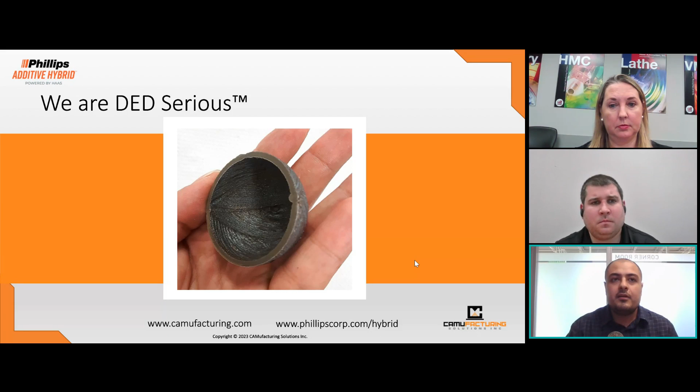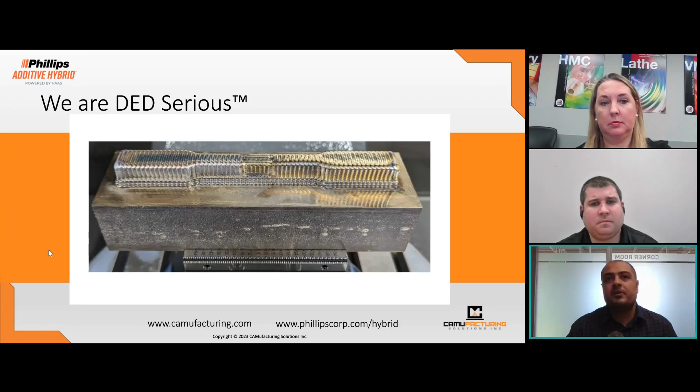Here, actually, you can see a dome. The reason I have it here is to emphasize that we are very DED serious. That means we don't only work on the software product, but also we try to move DED forward by research. We will talk about this part a little bit more later on. But the main thing I want to say is that we always say that additive manufacturing is not just reverse machining toolpaths. And every single parameter that you see in APlus, we design and enhance based on the characteristics of DED. And that cannot happen unless we stay ahead by investing in research and forming partnerships.

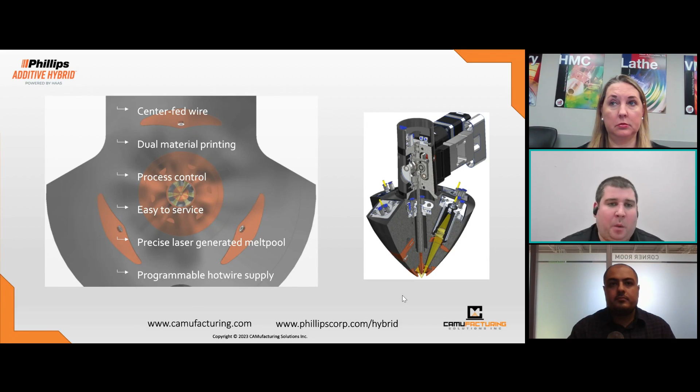Kind of a quick overview or image of our hybrid integration. So we're mounting this Meltio deposition head on the right-hand side of this, in this case, a Haas UMC 750 spindle. We integrate across the large majority of Haas mills. But regardless of the actual mill being used, we always mount on the right-hand side due to the tool changers being on the left-hand side of the spindle.

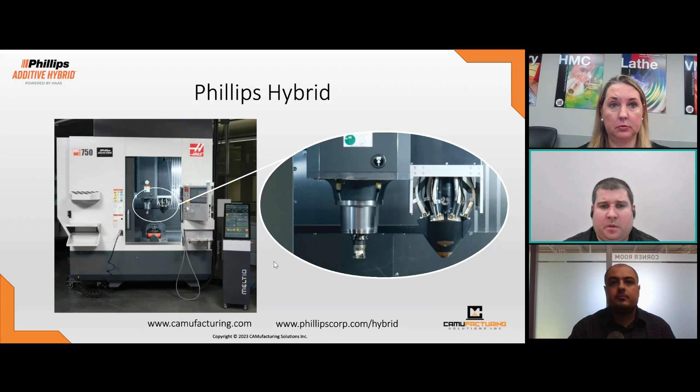At the end of the day, this is still a laser welding process. Really nothing new except we're adding this technology into CNC machines. That way we can deposit and then remachine all in the same system. So conventional, standard operating procedures for welding would be applicable to this technology.

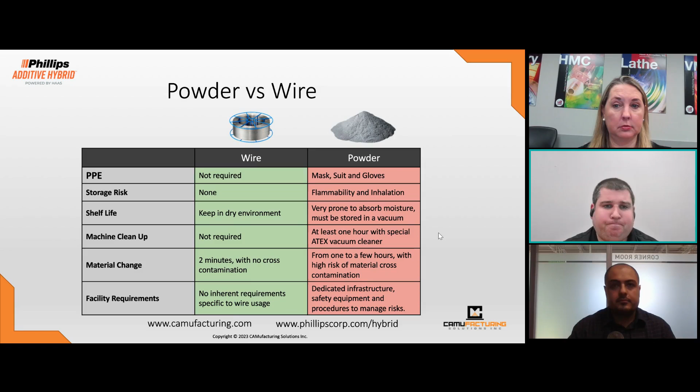Kind of the steps that we take to integrate machines. So we're mounting onto, as I mentioned, the right-hand side of the Haas spindle. Depending on the actual Haas model used, we have specific adapter plates. So we drill and tap into the casting of the Haas mill, and then we indicate our adapter plate square to the machine, which allows us to maintain the machine geometry when we add the deposition head. So that way essentially the W axis or the redundant Z axis is square to the machine tools X, Y, and Z, and then in some cases rotary axis as well.

We add laser safe glass to make the enclosure laser safe. That way we don't have to wear additional laser safe glasses. I kind of joke and always say it's like looking through a pair of nice bluely tinted sunglasses. And then we add additional door interlocks on the side of the Haas enclosure. That way, there's no way to open the side doors while we're printing, and that's all interlocked back into the Meltio system. That way, if the door were to ever be forced open, it would automatically break laser security, and you would automatically shut the lasers off if the doors were open.

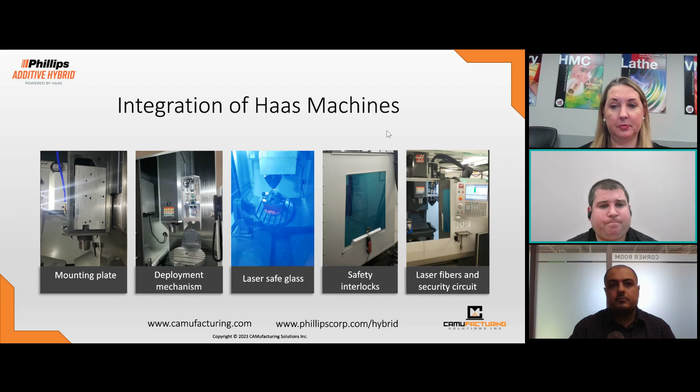Overall, Meltio's technology, when we talk about CNC integrations with Haas machines, we're kind of middle of the pack when it comes to overall part size as well as complexity. When you get into really fine resolution parts, under 0.5 millimeter track widths, powder bed fusion can certainly make a lot more sense. But we're going after kind of the larger range of applications, parts that would be casting replacements, or parts that may be machined from an expensive billet. That's kind of the realm that we're looking for hybrid applications.

The fine features, we can get down to about 1.5 millimeters track width and about a 0.5 millimeter high layer height, but we're really focusing more on that 10 to 20 kilogram part range.

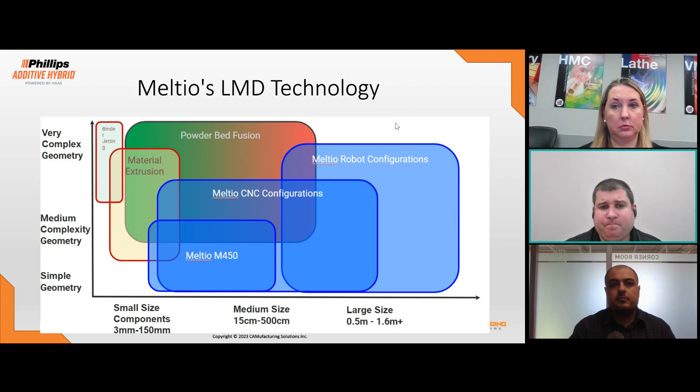Overall, because we're integrating into a Haas controller, the G-code structure is very straightforward. We have additional M codes to turn on the actual welding functions, lasers on and off, start wire feed, turn off wire feed, etc. It's essentially the same G-code you would run on a normal Haas machine.

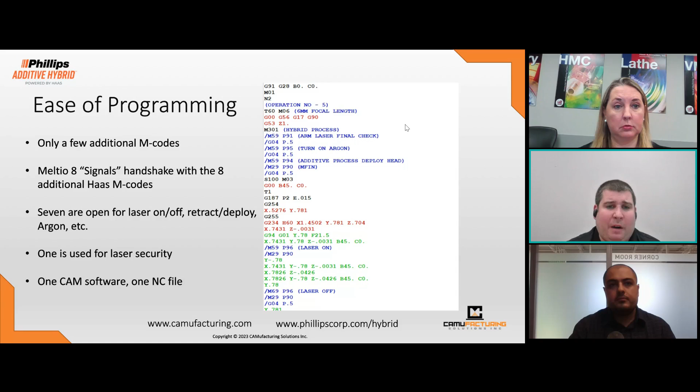Anyone familiar with G-code structure can see all the block deletes. We put block deletes on all of our welding lines of code. That way, if you wanted to turn on block delete and omit those sections of the program, you could do a dry run on the machine as well. So that's why all the block deletes are on those lines.

We use a post processor that we've worked with, post processor developer Postability. So it's one G-code program to run both the additive and subtractive. We're not merging NC files together. This is all coming from one post processor, one machine simulation. And that's really the point, and why we've worked so long with Mastercam, APlus, and Postability, is to offer this fully packaged solution where someone's using one software to do all programming functions of this machine.

So it's very straightforward. We'll get into some of the GUI in Hamoon's portion of the presentation, but it's a very streamlined approach. Mastercam users will see a lot of familiarity when we talk about the additive toolpaths inside of APlus.

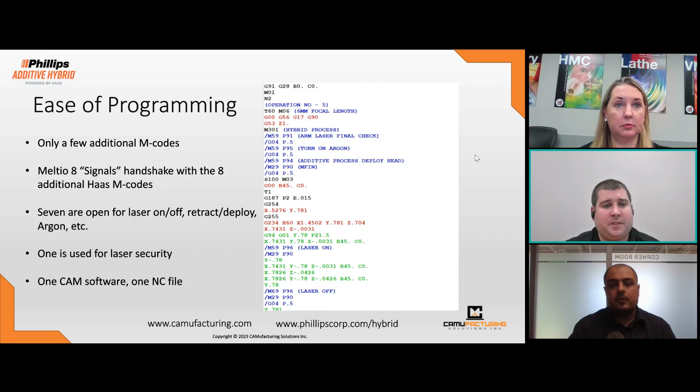Now back over to Hamoon. Thanks, Brian. So before we get to some actual case studies that we are going to talk about today, I would like to give some introduction about APlus itself too.

So APlus is the additive add-on of Mastercam. It supports programming and simulation of additive manufacturing processes in Mastercam, and it's seamlessly integrated with a very familiar interface. That means when a user installs APlus on top of Mastercam, they will just get 2 extra ribbon bars on the top ribbon bar.

And we try to keep all the toolpath interface very similar to Mastercam. That will make it much easier for existing Mastercam users to learn APlus too. APlus is optimized for directed energy deposition, but it has a modular software design to support new and other additive manufacturing processes too.

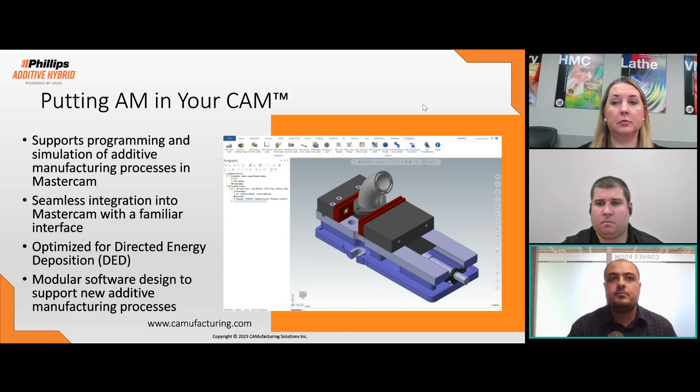So what is very important here is that APlus is not just like a slicer that you can see. It has a lot of different solutions for different types of geometries and different types of manufacturing strategies. For example, this part you can see, it's built with an APlus rotary toolpath.

On a Phillips hybrid Haas UMC 750 with a 1.2 kilowatt Meltio print engine. So it was built with a rotary toolpath, meaning it was built with a continuous deposition without any planar slicing.

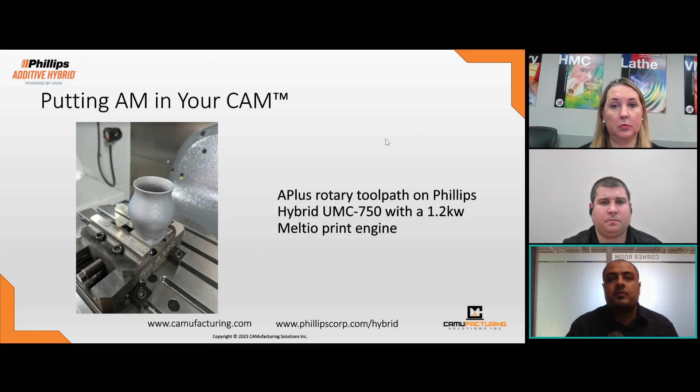So if I would like to talk more about different toolpaths, we have 9 different toolpaths and solutions in APlus that you can use based on the part characteristics, geometry, and the strategies that you want to use.

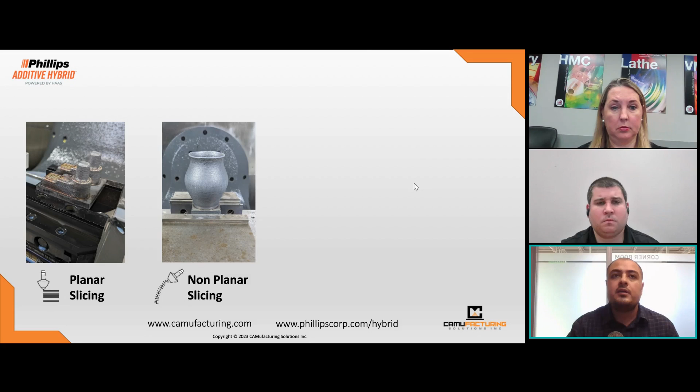If you have a part like this, you can just use one of our planar slices, which is AM slice or AM exact overlap. But if you would like to build something like the next picture, a rotationally symmetric part that's a thin wall, you don't even need to slice it. So you can use a non-planar slicing strategy, which in this case is AM rotary.

But if you would like to build on top of a cylindrical substrate, for example the picture you see, or even make a roll die or repair a roll die, because that's the advantage of hybrid manufacturing, that you can machine, add material, and then machine again, we do have a slicer for that, called radial slicing. It slices your geometry radially, uses a polar system instead of Cartesian, and it's very good for this kind of part.

But if you have a part that you would like to slice, but not through a normal build plane or radially, a part like this, you probably prefer to slice it through the spine, which is swept around it. So that's why we have a spine slice, and it means you definitely have to have a variable layer height, but that is also possible with the software and this Phillips hybrid machine.

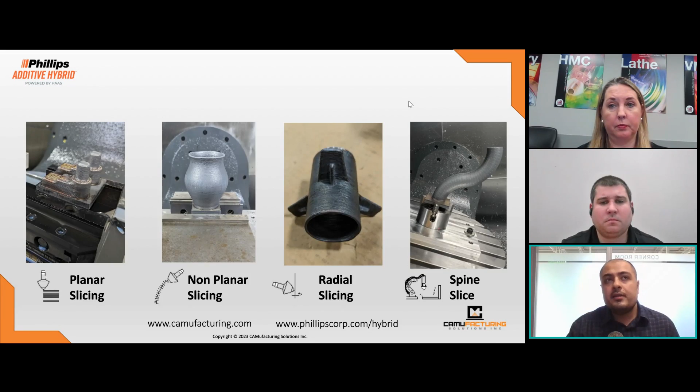So on the next slide, we can see more examples of our non-planar build strategies. For example, the two pictures you are seeing now are both spine slice examples.

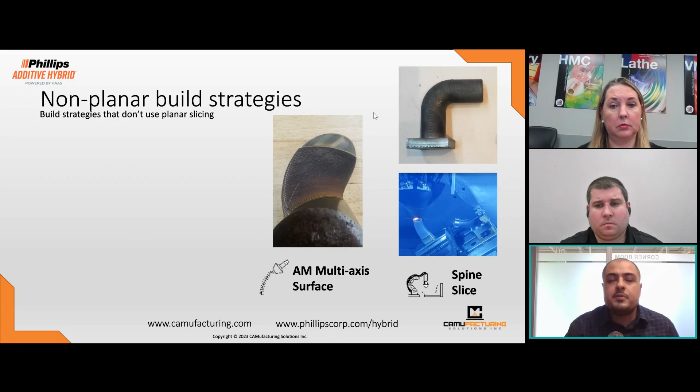But we do have also another toolpath, which is AM multi-axis surface. So for this toolpath, you just can use any surface in the 3D world. It doesn't have to be planar or any shape, and make a toolpath on it. It's very good to build like turbine blades like this, or even to coat a surface or make a repair on an existing mold. Also, on the next pictures, you can see more examples of rotary or radial. These are some of our non-planar toolpaths.

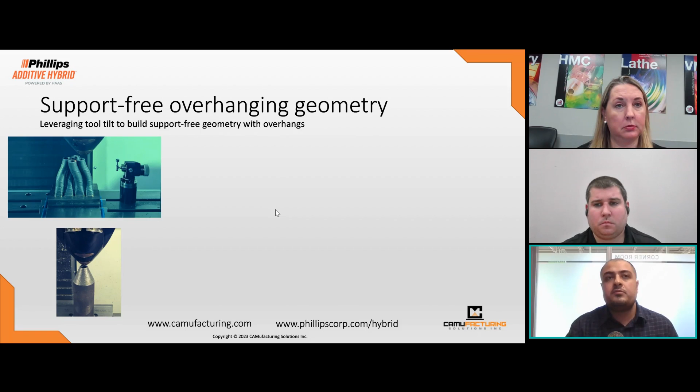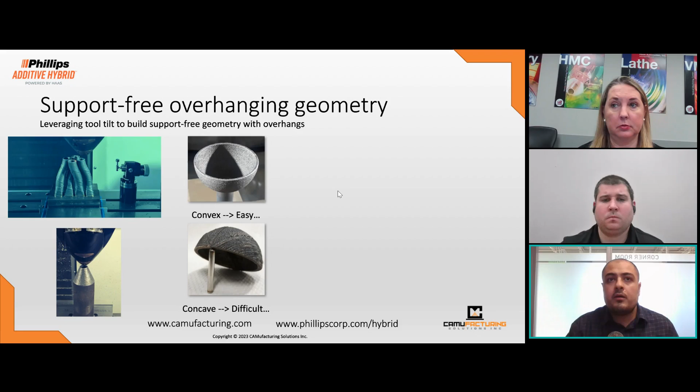Also, for your strategy and the way you are building the part, we try to have different solutions. For example, if you would like to build a convex dome, it's going to be very easy. You can just use a rotary toolpath and build it, as shown in this picture. But if you would like to build a concave dome, it's going to get more difficult. So this picture may look familiar from the introduction part. This is actually one of the parts that our research team worked on a few years ago, in order to build a concave dome with a 3+2 solution.

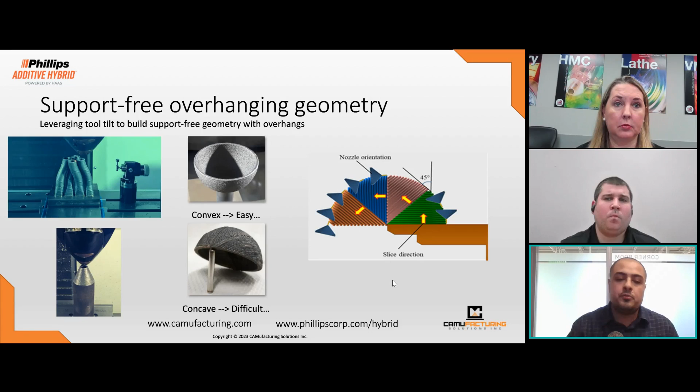As you will see in the next picture, our researcher divided the part into 45-degree sections and sliced them with those build planes, and tried to keep the nozzle always tangent to the geometry. So build them as these wedges. So that's the strategy. We always try to put a lot of effort into research in order to find new toolpaths or enhance our existing toolpaths. So now I would like to pass it to Brian again in order to get more details on some of the real hybrid case studies.

Thanks, Moon. So the first application that we have is actually the demo that we were running at IMTS back in 2022. And this is a part that we got from one of our Phillips customers on the subtractive side. So Phillips, we sell Haas machines on the East Coast and to the federal government in North America, actually worldwide. But this came through our commercial group for Haas, and they had an application where it's really a casting component, relatively low quantity, and the idea is that we could print this as a casting replacement.

We actually printed the entire order of parts for the customer during IMTS and setup. I think we printed around 13 or 14 of these components at the show, where we used a variety of different toolpaths for additive and subtractive, and built the entire part on this UMC 750 in 2 operations. So the lower section was printed and then machined, and then the spine portion, or the curvature portion, was then printed. That way we could access the lower section with a standard end mill to machine the lower portion, print the spine portion and the top transfer section of the tube, and then do all the final machining and then part it off. So we have a video that'll play in a few seconds, and it'll walk you through the process of how the part was programmed and set up.

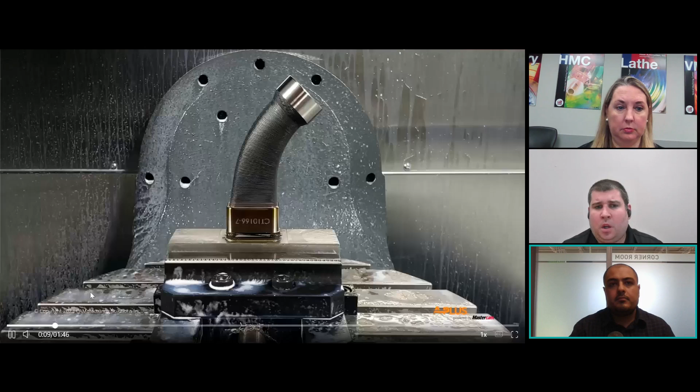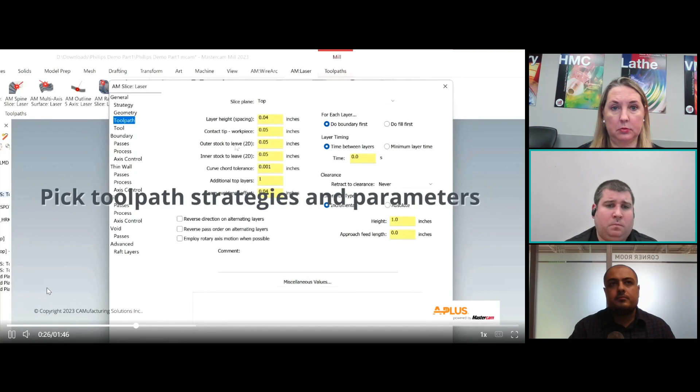Yeah, so there's a little bit of a delay on the start of the video. So as I mentioned, this is the actual component. It was mounted in a self-centering 5th axis vise to do op 1 on about a 2-inch by 2-inch base, about 6 inch long, that was reusable. So we parted off the part, and it wasn't a consumed build plate. We just simply overprinted on the bottom section.

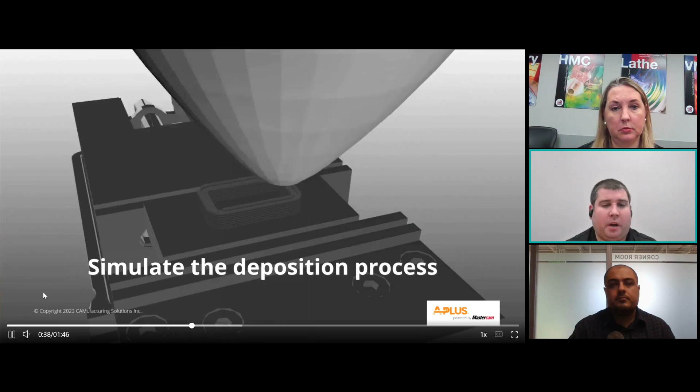So it prints the bottom section, and then we'll machine the bottom section, print the rest of the part, and then final machine the rest of the part, and then part it off as the last set of toolpaths on the first op of this part. And then it went into another self-centering vise for op 2, which we'll see in the actual real-time video from the show. So we have some simulation and verify of the actual as printed beads, machined, and then back to printing after that series of operations.

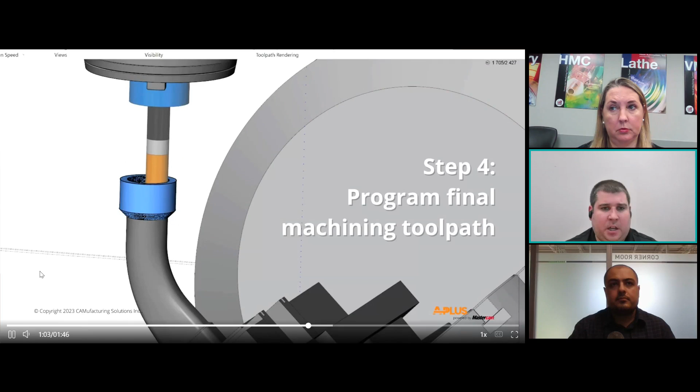Final machining of the round portion of the flange. Quick shots of machine sim showing kind of the milling spindle and additive head deposition, or extension of the additive head deposition, and then the actual video. So you can see both setups on the same table. So it's a pretty good application. Really great application for this technology.

Especially if you can avoid having a low production run of a custom casting, 316L stainless, and not something that you really could machine easily, if at all, because of that curvature. Avoiding with hybrid, not having to have a drill come in from both sides and try to take a lollipop ball mill to kind of surface machine the inside of that cavity, because the component didn't require it. So much cheaper just to machine just the areas we needed and produce the essentially near net shape via the Meltio deposition process.

This is another demo part we ran at a trade show. If anyone had visited us in SouthTec in Greenville, South Carolina, we ran this wrench. Obviously, there's much cheaper ways to produce a box wrench or open end wrench. However, this is really a proof of concept showing that we can have dual material components. So the big kind of takeaway behind this is that there is tool steel in the open end portion and the box end portion of this wrench. So it's H13, about 2 beads thick, the entire height of the part. And then the rest is 316L stainless.

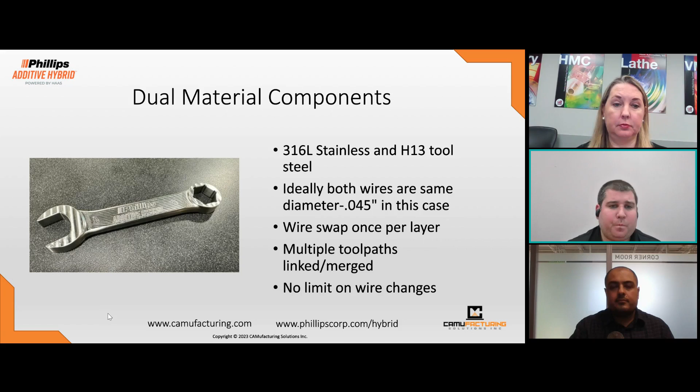You can even do dissimilar layer heights. So maybe you have a component where you want to use a 1 millimeter or a 40 thou layer height. You could have another part using a 0.5 millimeter or 20 thou layer height and still Z-layer merge those together. So super functional tool. I would say almost every single part I program for additive operations, I'm using this Z-layer merge.